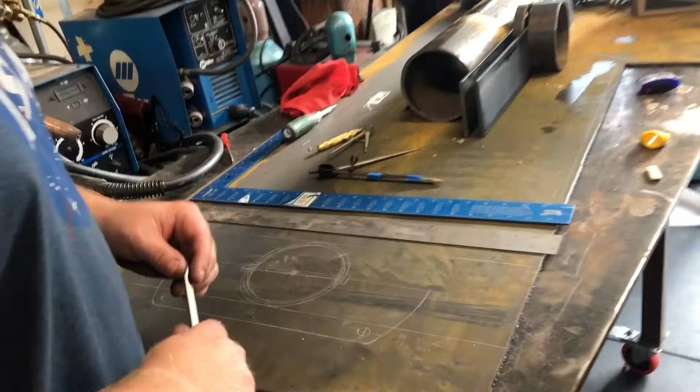I'm Alex, I work with Joe on occasion, and this is a pretty interesting situation he presented me with. With the pictures we've been provided and the situation explained to me, they're having a problem with the cross member of the goalpost being parallel and being able to adjust and maintain it. There's a couple of factors that cause that.

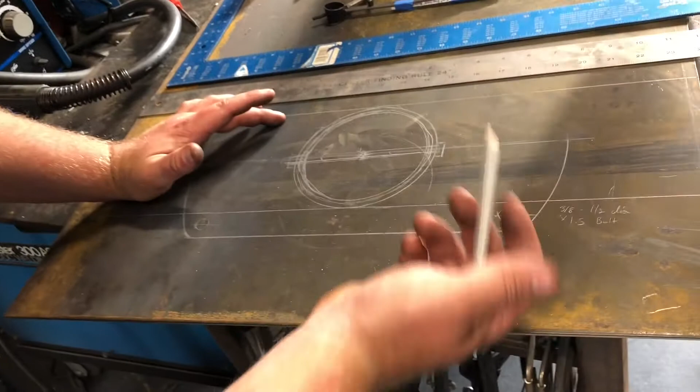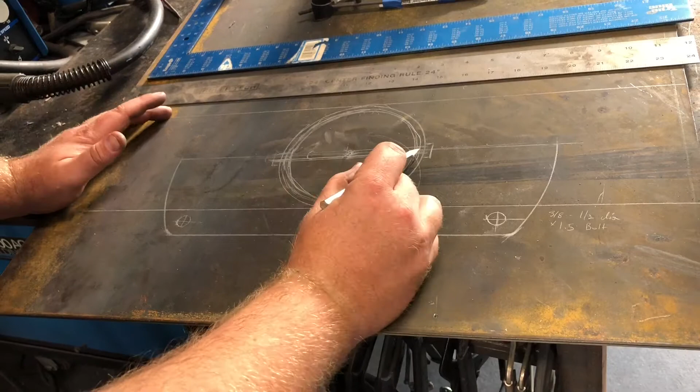One of the factors is, if you can see here, this is the system you have right now. This is your cross beam, this is your gooseneck, and you've got a collar in that gooseneck with a central fastener that goes through. So there's a great deal of force put on this fastener due to wind or whatever forces are exerted on it, which would be considered shear force.

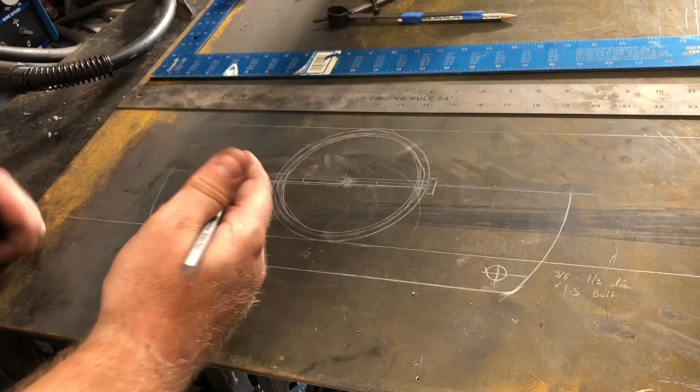This fastener is made out of steel, the goalpost is made out of aluminum. So anytime this thing moves, wiggles, or gets any vibration, the metal that's going to fail is the aluminum. The steel maintains its diameter and shape, while the aluminum kind of melds around that steel, wallers itself out. So over time, as this thing wobbles, that hole is going to get longer, it's going to stretch. Sometimes, depending on if it's an orbital action, it just becomes a bigger hole.

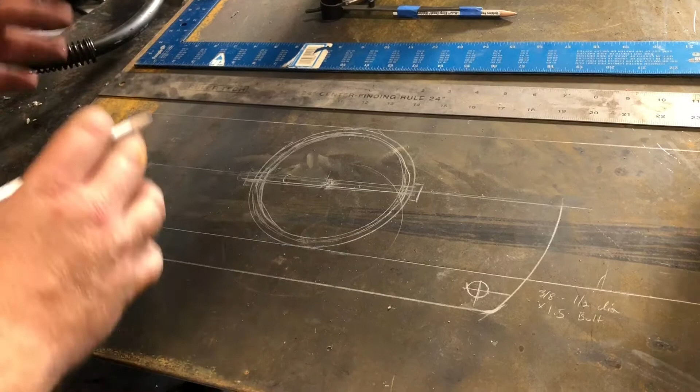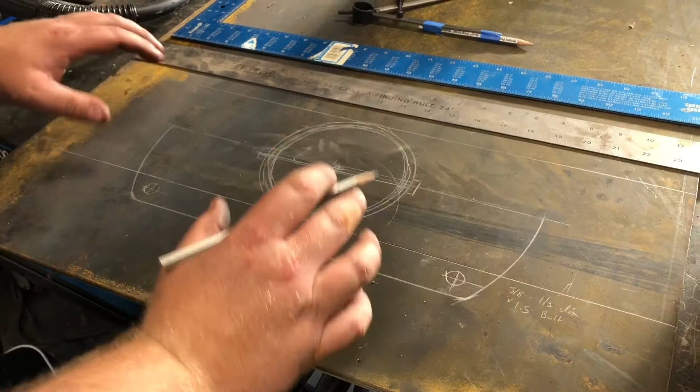So instead of going back with that same situation and putting more bolts in, bringing something through front to back which you're going to have play in, I'd propose a different system, which we've also illustrated here. The plan is, instead of having the bolt go through the two sections of pipe that are sleeved, with that union being central to the gooseneck, we want to bring those forces away from the center, away from the axis point. We're also going to change the way those forces affect the cross beam in relation to the gooseneck.

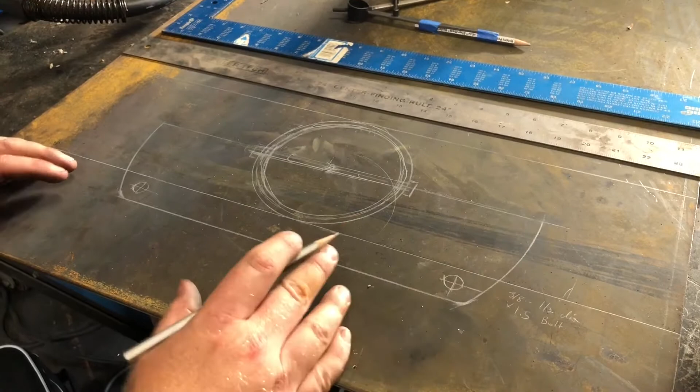What we're proposing is using a system of two plates, as you can see here, which aren't quite put together. We're going to slide this one out, and drop that right behind there. This represents what you have right now, the connection welded to the cross beam to the gooseneck that fits into the receiver of the gooseneck. And this is actually the gooseneck.

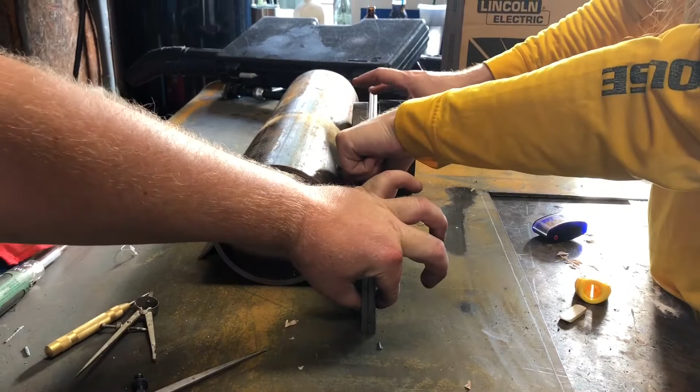So with everything in place, we're going to put together basically this arch here. This will be two sheets of metal you can't really tell from this angle. We're going to put two bolts in here just inferior to the cross member, and use friction to pinch these two plates together away from that center axis point, in order to keep that force from moving the goalpost from the position it wants to be in. So once they get it fixed, it's not going to be able to wobble and move and affect it like it would at a central axis point.

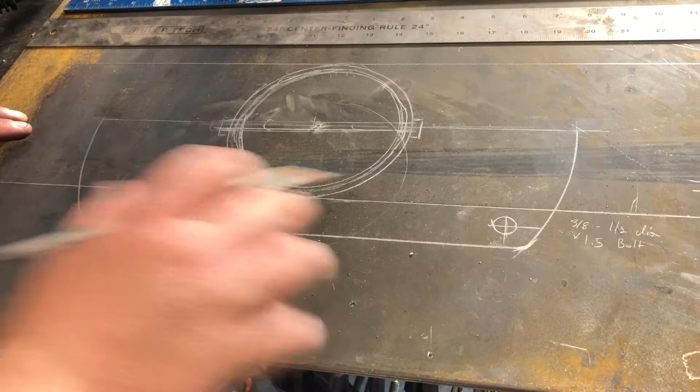It's going to reduce the amount of torque placed on the fasteners, and the fasteners aren't going to be responsible for that torque as much as the two plates are, in friction with one another.

So Alex, one of the things we're looking at doing over here, let's try to help illustrate this. So this here is the long cross member right here, and here's that little piece coming off, and this piece here represents the gooseneck. As these guys are sitting right here really close together, we need a smaller piece, about half of this, so we can show one side.

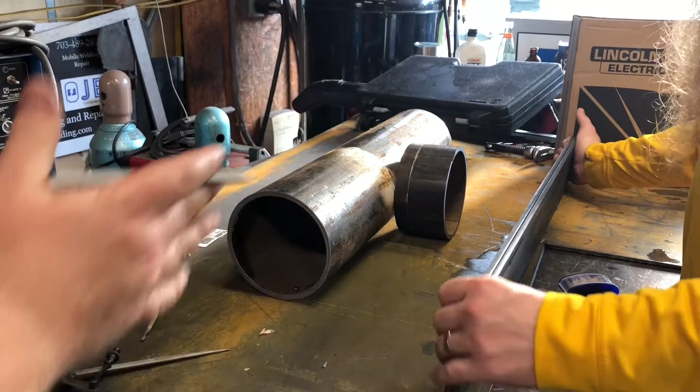Essentially what we're going to do is these two plates here, they're going to be made out of aluminum, much thicker than this - this is just for demo purposes. But we're going to cut these two plates down and make a nice little arch in here, so we can take the plates underneath and sit them around both the gooseneck piece as well as the attachment piece right here.

Essentially, basically, we're going to help start to form a collar. And as this plate, which I'm just going to show up here for illustration purposes, you can imagine it right here.

Move this here. Here's our attachment piece. If you can imagine, this plate has been cut off so they can sit around the attachment piece here. We're going to come up probably about halfway up here.

We're going to weld around here. And right here where the plate comes behind the goalpost, we're also going to make the weld attach points out here. Again, trying to help make that smaller pivot point, make it wider to help reduce some of the leverages against it.

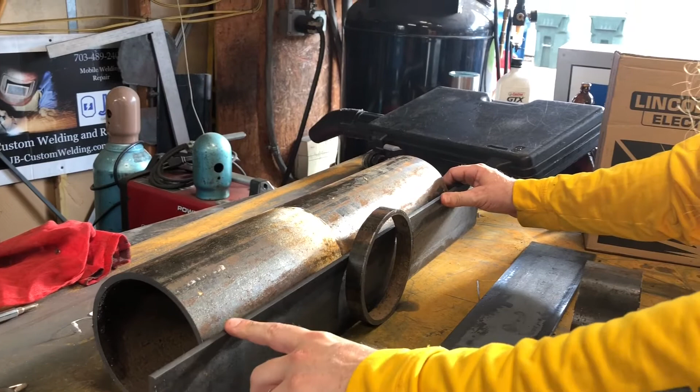And then the way for you guys to help line the pieces up, there'll be a hole in here and here. We will put the second piece, shows up right here again. This piece would also be cut out and will be welded underneath the gooseneck right here.

And the holes will all, if you can imagine, the plates will actually be touching each other with the two bolts running through it. And then essentially crank that up. Does that make sense here?

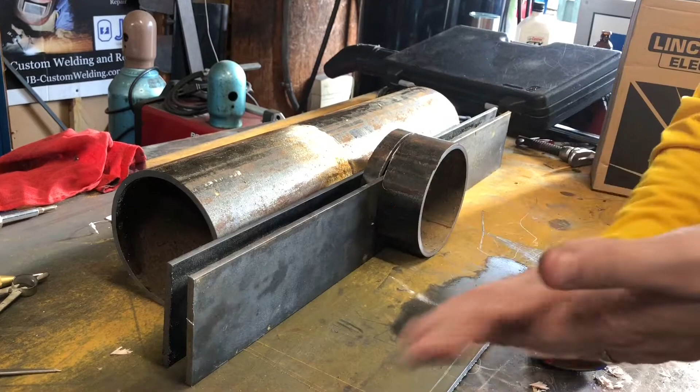Cool. So, like we showed on the picture here, we've got a plate that's going to be attached to the cross member and a plate that's going to be attached to the gooseneck. Essentially 2 plates right up against each other that'll be manufactured in-house to be true, and then welded in place once we get there to the field with two bolts.

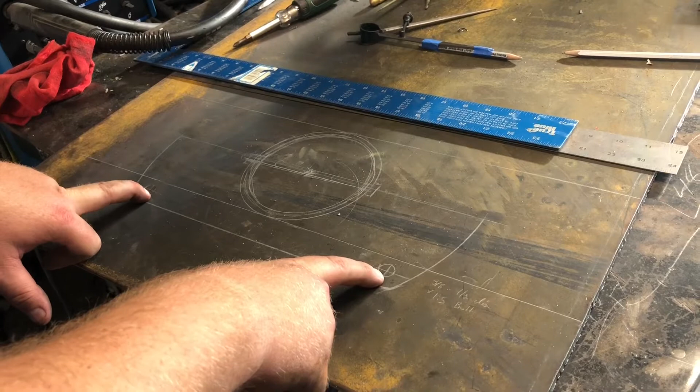You know, 2 anchor points. So it wouldn't be anchor points, but it would be 2 connections. So you have these 2 connections at the corner, or it could be any connections you want it to be, but two would definitely suffice for what you're doing here.

So when they want to take it down, all they have to do is just remove those 2 bolts right there. And these bolts would be 1.5 inches long, as opposed to something 7.5 inches long that you're trying to connect everything through the pipe with.

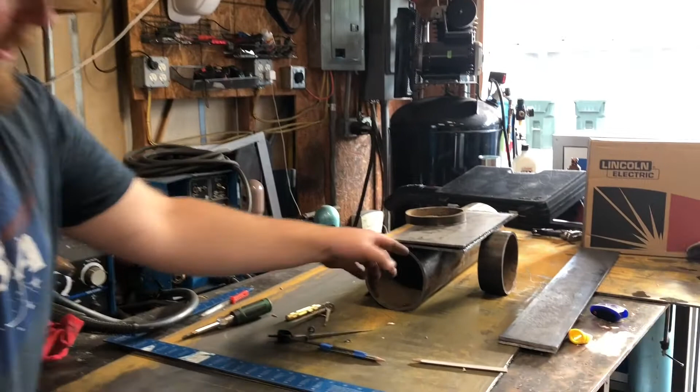We transfer all that to a set of plates, which would look like this right here. If you want to come down here and shoot down to the side here. I'm going to step to the side.

So essentially what would happen, if you can visualize this being part of the cross member, kind of like what you have there at the field, and this butting against another section of pipe, one section of this plate would attach to the cross member on this side, would weld across the top, would stick down just slightly below, just enough to get the bolts through it, and then this other section of plate would actually weld to the gooseneck.

Where the cross member receives it, and would be welded around that, around the pipe itself, essentially creating a collar. And then your connection points will be away from the center of that pipe.

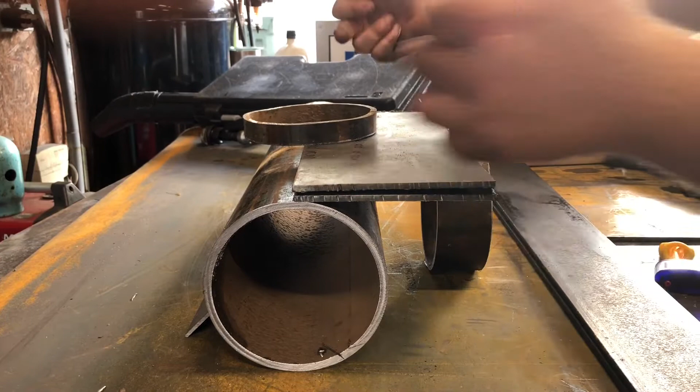Using friction, you'll connect through here as opposed to connecting through here. And you're going to get rid of that shear force using the connectors, and everything's going to become friction. It'll be a friction connection as opposed to a shear connection.

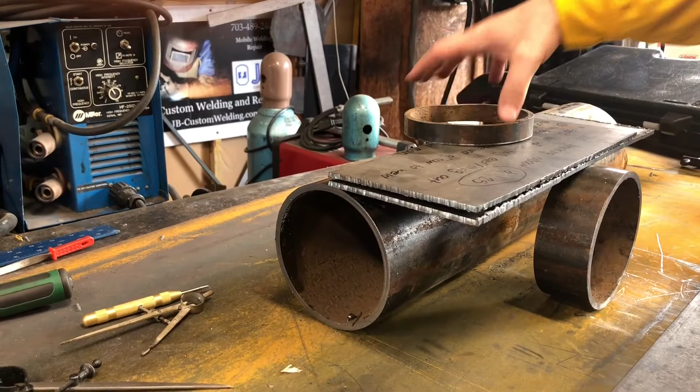Right, so okay, so basically there will be 2 plates here. Imagine this plate being cut out and this piece sitting all the way firmly against the pipe. That front plate will be welded to this connection piece here, and it as well be welded out here. That second plate will only be welded around the gooseneck itself up here.

So basically, you just separate those 2 bolts, the plates, then you can detach the upright, the cross member, and then because those plates will be drilled together, when they come to put it back up, we can have super tight tolerances where those bolts are at.

Correct. And not have to worry about trying to come through and line it up straight. It'll just be nice and tight right there and be quick and easy to take apart.

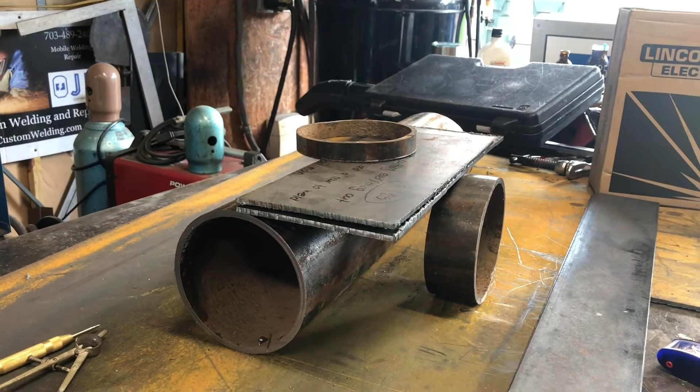And when you do the install, once you've fabricated the collar that's going to go on the goalpost, you get the goalpost perfectly set like you want it to be set. You're going to get that cross member level. This is going to go in place after it's been leveled, and it's going to have something that returns to true zero.

Yes. So as soon as you put it together, as soon as it's welded up, it's going to return to absolute zero every time you put it together. That's right. That's right.

So hey, just want to recap real quick with you guys. Essentially, kind of the takeaway points here. One, I think it would be easier for you guys to take the field goal post down.

Also, this also keeps us from having to try to drill through the cross member. It's just going to be very difficult to get that through perfectly without creating a little bit of wallowing on each of the ends. So this way it avoids that altogether.

I think it'll be less noticeable from the front. You won't see the bolts coming through if you're on the field looking towards the field goal post.

Also, one of the things is that if the holes where the new brackets come through wear out, we can always replace them with a new bolt, a slightly bigger bolt. Makes it a little bit more scalable.

And I think that's pretty much it. So hopefully this explains it well. Thanks, guys.